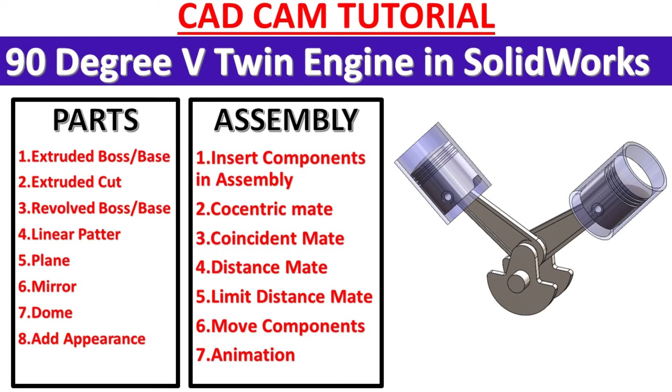Here we will make a 90-degree V-twin engine in SolidWorks, and we will learn part modeling and assembly, and also make animation at the end of the video. I hope you like it.

So let's start to create this simple animation and assembly in SolidWorks. Let's make the first part, the piston of the V-twin 90-degree engine. Zoom in here - all dimensions are in millimeters and the material is steel polish. This is our first part, the piston.

The overall length of this piston is 70 millimeter. Diameter is 70 millimeter. There is one dome shape of 5 millimeter. This is also going to add, but from inside you will see 6 millimeter thick. The inside diameter is 58. If you calculate, the wall thickness is going to be 6 millimeter. So this is what we are going to make.

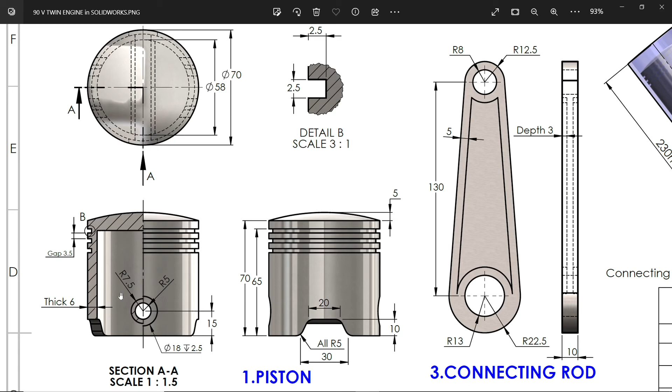You will see 3 piston ring slots. In the detail view, the gap between these two is 3.5, and 2.5 is the actual size, starting from the bottom face at 65 millimeter. Remember these dimensions. Here at another plane, 20, 30, 10 millimeter height. This is also going to be cut through all.

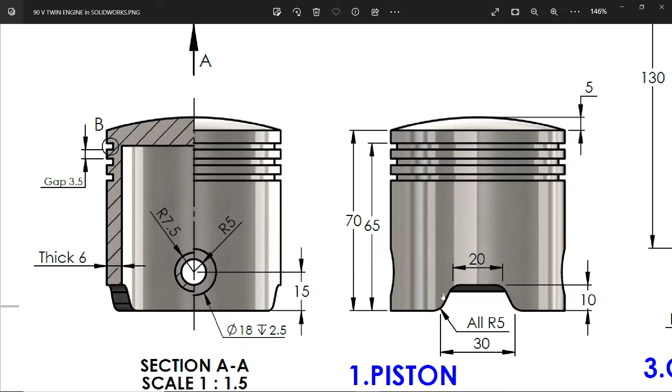First I am going to select the front plane sketch. Now activate the line tool, and I am going to keep this one as a center. Let me select this line as construction, so it makes it easier for drawing.

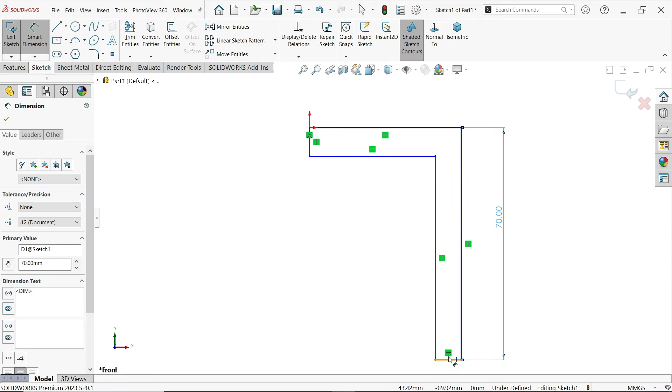Smart dimension, select this one, the length is 70 millimeter. Now select this thickness, let me choose 6 millimeter. Similar here. Now outer to outer distance - if I move my cursor outside it will show you the diameter, 70 millimeter.

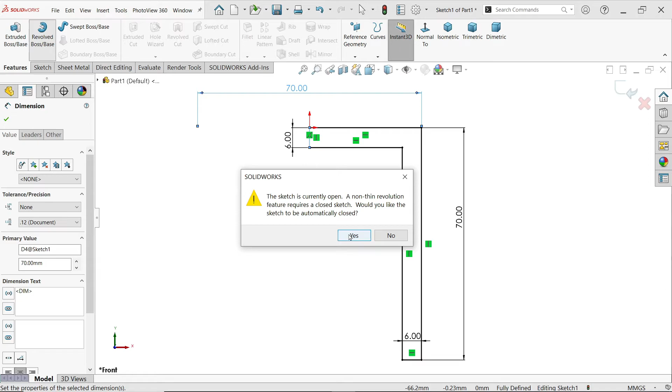Now go to features and activate revolve boss base feature. Due to this construction line, it is asking would you like to close the profile - say yes. The axis of revolution is selected by default by the system. Now keep end condition blind, angle 360, because we want a complete solid body. Say okay. I am going to add appearance from here, metal, steel, and this is going to be chrome.

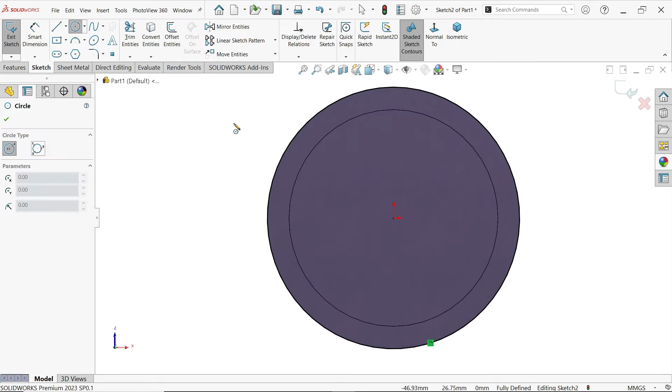Okay, let's add the ring, then we will add the dome shape. For the ring, I am going to select this sketch. Convert entity, so the outer line is converted. Activate circle, draw one circle, press escape to exit. Smart dimension - now the gap between these two is 2.5.

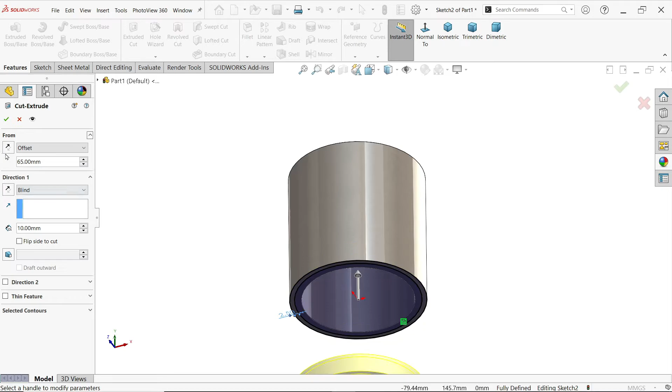Okay, now let's cut. Activate extruded cut. I am going to select offset, and start from 65 millimeter, direction downwards, and depth 2.5.

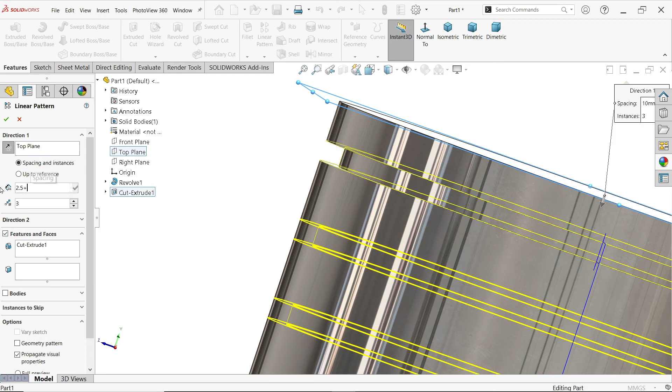Linear pattern - any plane, feature, extruded cut. Actually we need the top plane. This is going upside, change it. Now the gap between these two rings is 3.5, so you have to include 2.5, 3 number of instances, 2.5 plus 3.5, it's going to be 6 millimeter. Say okay, here we go.

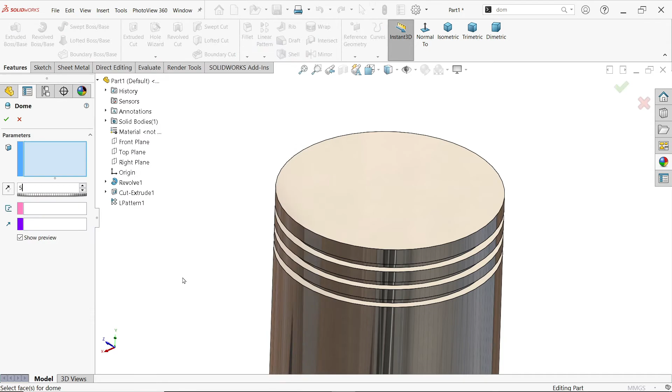Now search the command dome. If you click this eye, it will show you where it's located - automatically it will show you, you'll see this red arrow, dome. Click and activate. Now I am going to make a dome shape of 5, select this face and just tilt - this is how we get a dome shape. For the rest, show preview - if we choose elliptical, it will change the shape, but this is enough for us.

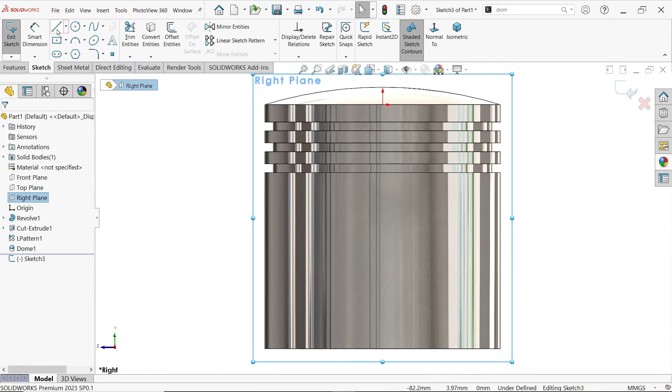Now select the right plane, sketch, activate line tool, connect, press escape to exit. Now let me do some corrections - make it horizontal. Let's do one thing: connect this center point to this center point, make this line vertical. Let's see what else can we do.

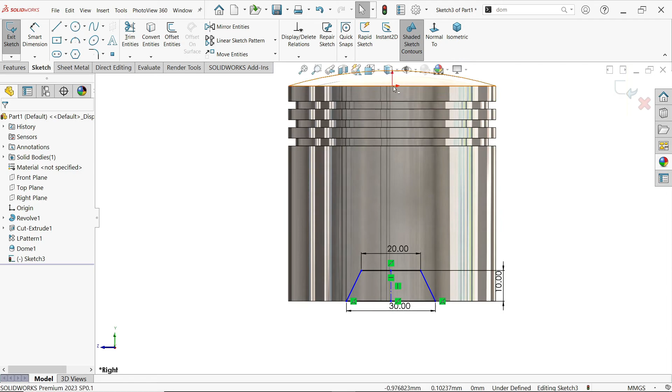30 millimeter, the upper one 20 millimeter, this height 10 millimeter. Now one more dimension we have to fulfill - this center point and this line coincide.

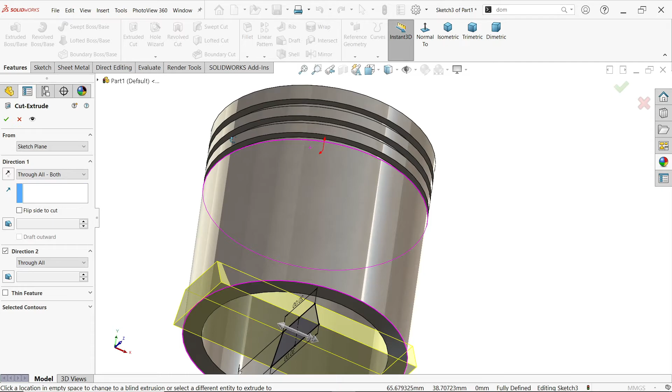Now that's perfect. Go to features and activate the extruded cut feature. This is located at center, so keep end condition through all on both sides, so it's going to cut both sides equally. Say yes - smart.

Activate fillet - first fillet type constant size, fillet parameter symmetric, and here put radius. Now let me select all radius - if I select the first option, connected to start loop, 5. Now see, the system detected all 5s and applied them. Say OK.

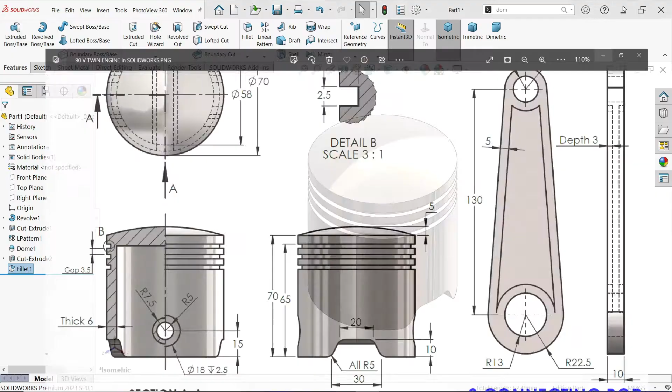Let's see here - there is one hole, 5 radius, then one solid body, 7.5. Then there is an outer cutout, diameter 18, depth 2.5 - remember this one - and height 15 millimeter. This is located opposite of this, meaning the front plane. Front plane sketch, now activate circle.

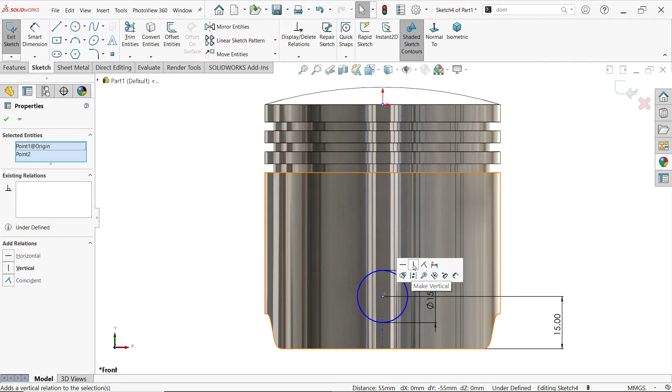Smart dimension, this is going to be diameter, radius 7.5 into 2, it's going to be 15. Distance from bottom is 15. It's still not defined, so press escape key to get out of dimension. Press and hold shift key, select origin point and center point and make relation.

Extrude. Now here select up to surface, select this surface. Go to direction 2, and here also I am going to select up to surface, and this time select this. So it is going to connect inside to inside. Say yes and see, this is created.

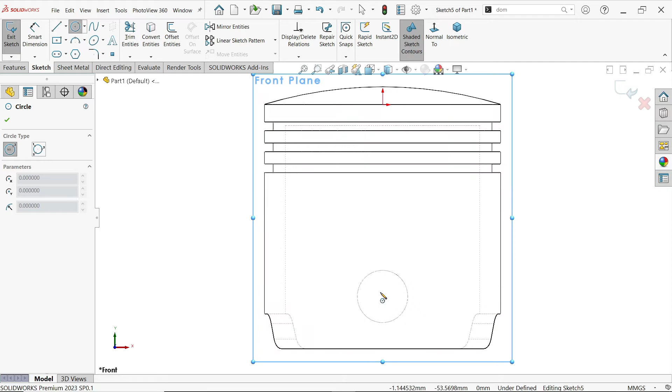Again going to select same front plane, sketch, draw one circle. Now show this one so that we will get center point. Smart dimension. Now this time I am going to activate 18 millimeter.

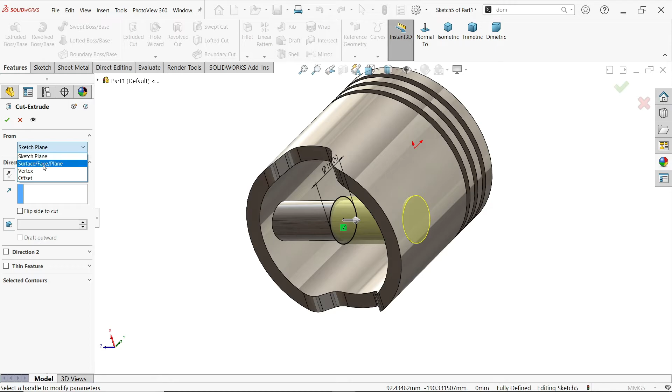Extruded cut. Now this is start condition, we will change to surface. I am going to choose this surface. Keep blind, okay, this is going to start from here. You will see the preview. Just remember this preview, 2.5 millimeter going to cut inside. Look, you will see the preview. Say okay.

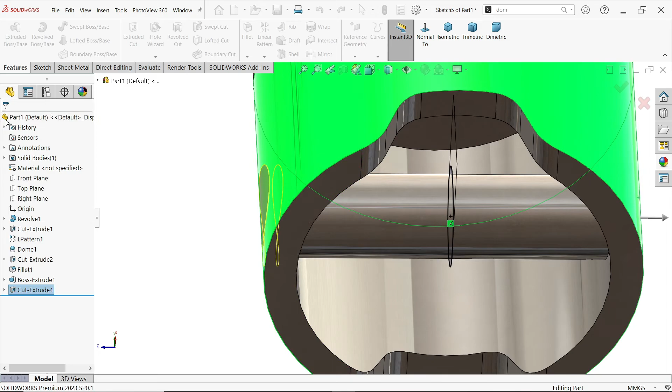Let's mirror this. Plane front, feature to mirror already selected. Partial preview. If you see full preview, it will show you both sides, so partial is enough.

Front plane sketch. Now here we need to make one hole. Select this one. Let's create a smart dimension, and this is going to be 5 into 2, it's 10 millimeter. Now move at center. See, it is fully defined sketch.

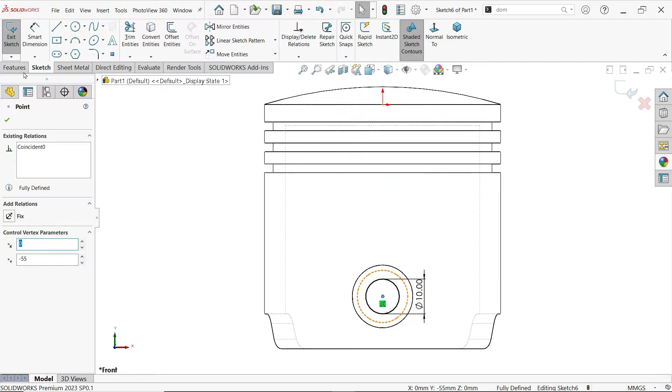Extruded cut, let me change this one. Now here simply choose through all both. See the preview. Say yes. Look.

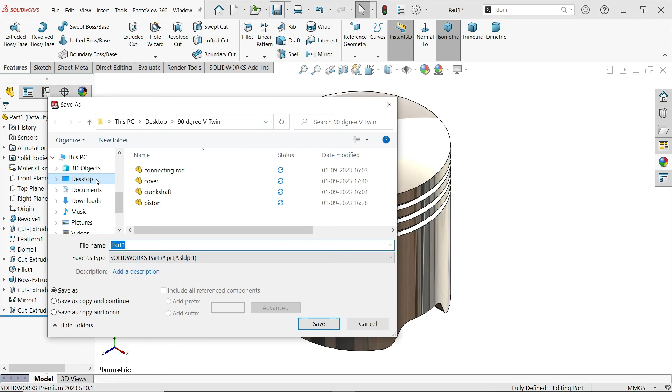Now let's save the first part. Go to desktop, create new folder: 90 degree V twin engine. Now this is part 1, okay, we will change this name later. Let's do a new part. Select new, okay.

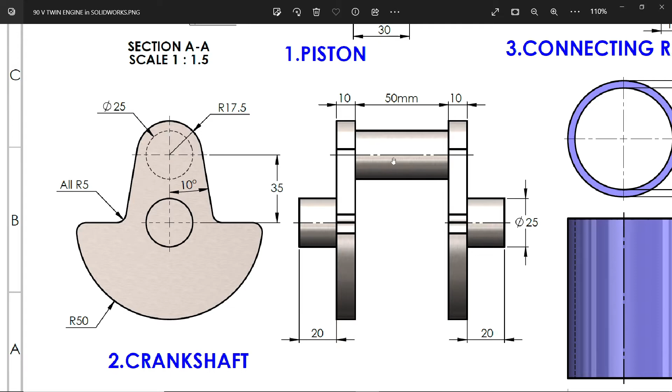Now the next part is connecting rod or crankshaft. First we will make this web. You will see 50, R5, 10 degree corner, 35, and outside radius 17.5. It means 35, thickness 10 millimeter, and there is one circle, this diameter 25 and width 20. So let's make this. Then center there is a rod shaft, 50 millimeter.

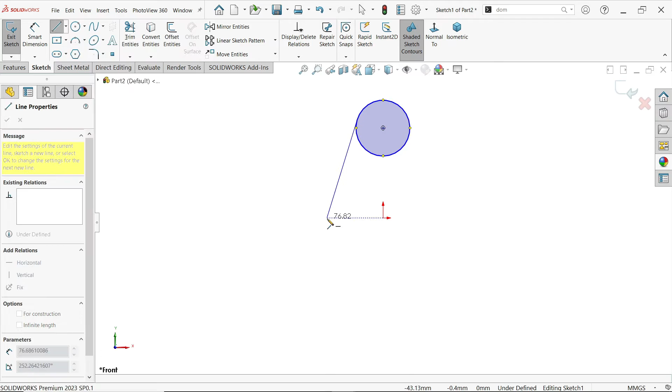Front plane sketch, now I am going to draw. Let's draw one circle. Press escape key to get out. Again activate line tool, draw one tapered line, something like this. Go back to the point and see the line is converted into arc.

Move cursor and you will see tangent point. At that point, press left mouse and click. Press escape key to out. Now first important thing, select the center of this, hold shift key, select this, concentric. This is going to be good. Select this point, hold shift key and origin point, make vertical. This is also important. Now select these two, equal.

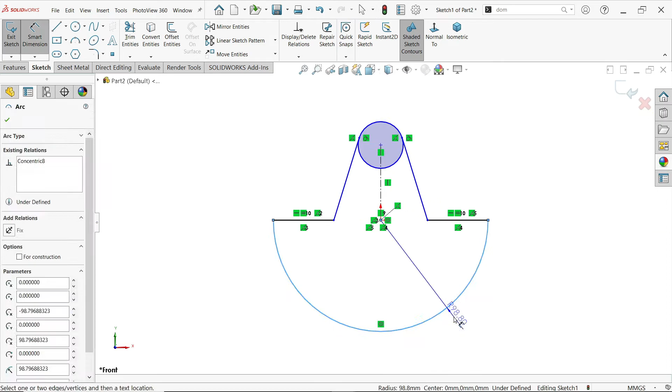Okay, let me draw one circle. Smart dimension. This radius is going to be 50 millimeter. This diameter 35 millimeter. Center distance 30 millimeter. Now angle 10 degree. Now look, this is fully defined sketch.

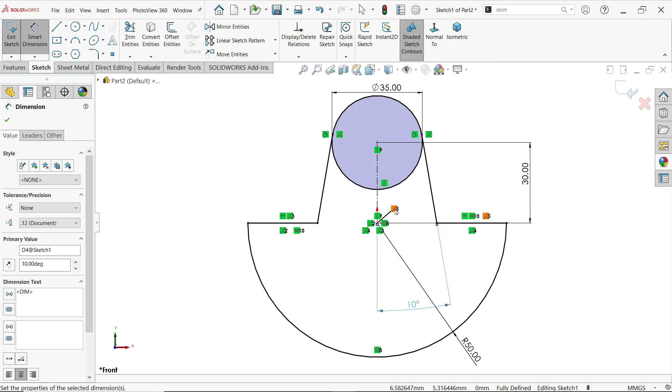Press trim entity, power trim, and just trim this. Okay, now we have one closed profile. Simply activate extruded boss base feature. Here choose blind, start condition keep same, blind 10 millimeter. It is moving in one direction, let me push to the other.

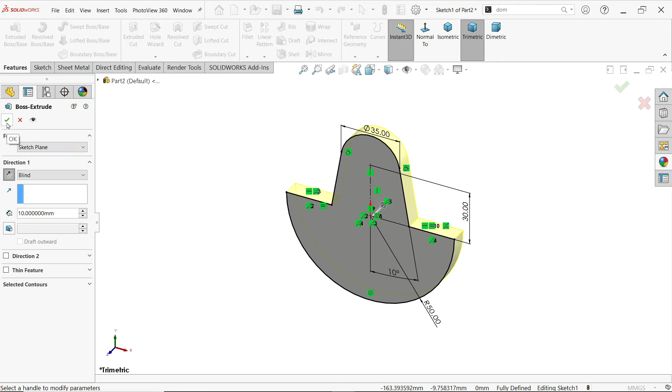I am going to activate fillet, constant type fillet, radius going to be 5, symmetric, and let me choose. Select this portion and you will see this option. Select this one and it will select all corners. Say okay. Look, select this face, sketch.

Activate circle and place at this origin point. Draw one circle. Press escape key to out and activate smart dimension, and this is going to be 25 millimeter. Extrude, and how long is this going to be extruded? Keep end condition blind, and the depth of this 20 millimeter.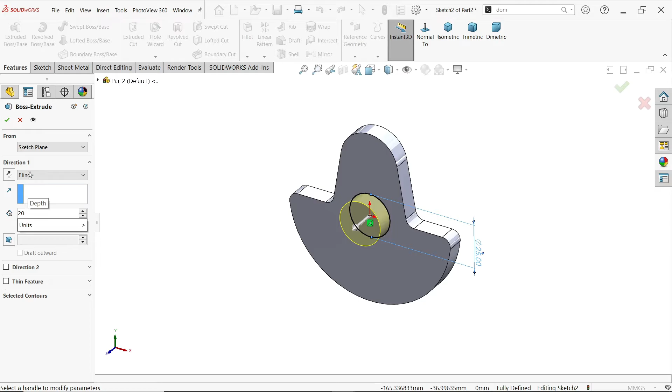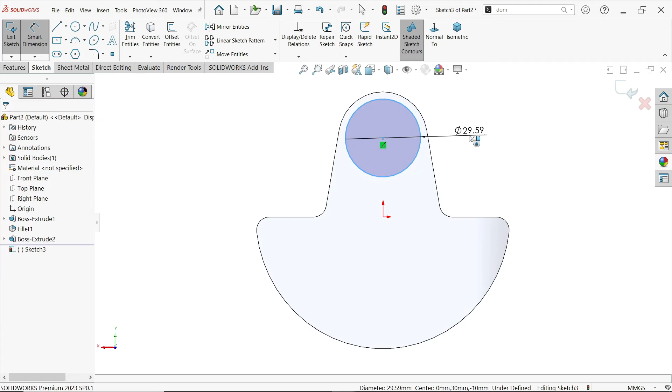Okay, similarly select this face, sketch, activate circle, keep cursor over edge and you will find the center point of this. Draw one circle. Press escape key to out. Now make this dimension 30 millimeter. No, not 30, it's 25.

Go to feature and extrude. And this length of shaft is 50 millimeters, so keep end condition blind and 50 millimeter is the length.

Okay, now I want to mirror these two things, so first we have to create a plane. Activate plane, select this face and you will see a mid plane. We selected two faces and we will get this mid plane. Say yes. Go to mirror.

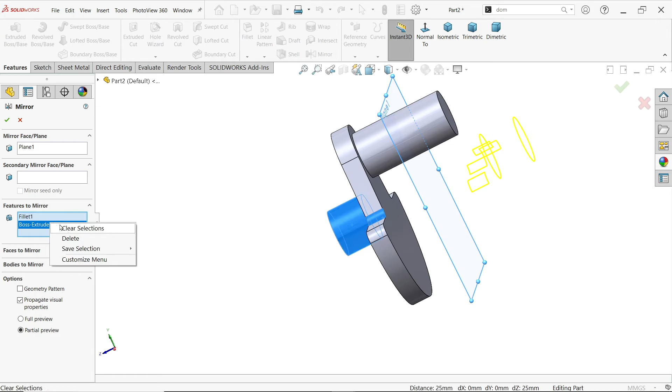Now plane is already selected. Go to feature, select 1 and 2. Clear 1, 2. Full preview, even though from here you can select, and here add fillet.

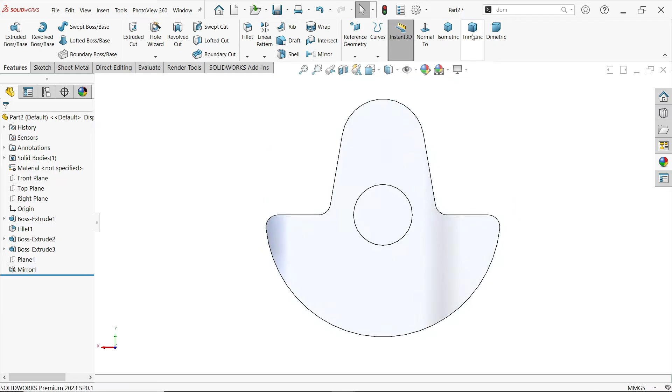Okay, now look, click hide. Now this time brush steel. Let me save this, this is going to be part 2.

Crankshaft. Save. Even though, let's go to options, document properties, image quality, keep image quality higher so that you will get a sharp edge.

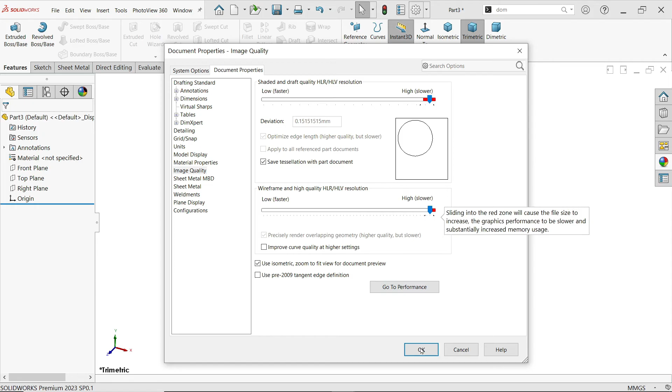Let's make a new part. Plain white. I am going to do all the necessary things like document properties, image quality, keep higher. Now here the third thing is connecting rod.

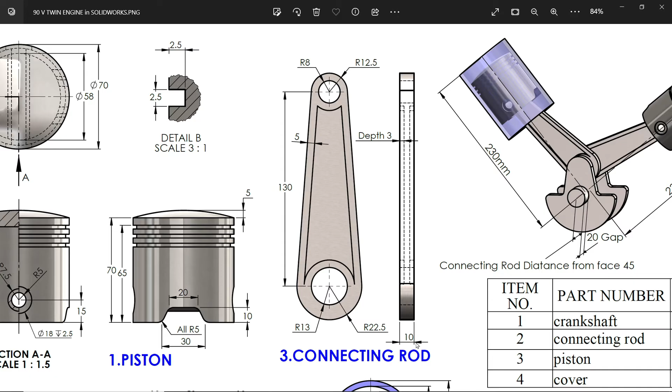130 length, you will see outer radius 22.5, 13 millimeter inside one. R8, 12.5 means outer one 25 diameter. Then there is a depth cutout 5 millimeter, depth 3 millimeter both sides. So remember this, and thickness of this 10 millimeter.

Let's say front plane sketch, activate circle. Now let me draw here 2 circles. Similarly at opposite upper side draw 2 more circles. Now let's do one thing.

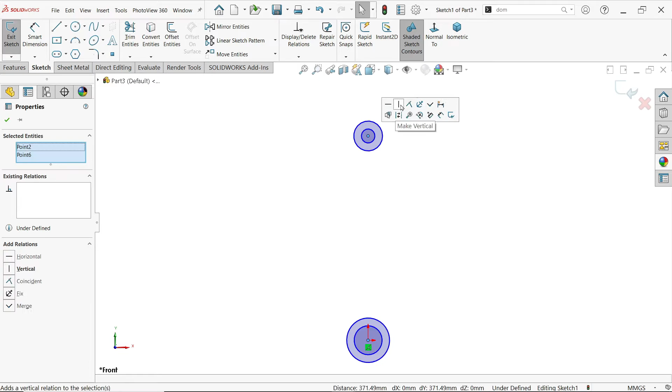Hold shift key, press and hold shift key, select both the center points vertical. Activate line tool, just click somewhere on the line and press at the place where you will get tangent point. Press left mouse and press escape key.

Again press L key in your keyboard and activate line feature or line tool. You start from this time here, come to this. Okay, here. Okay, let's start.

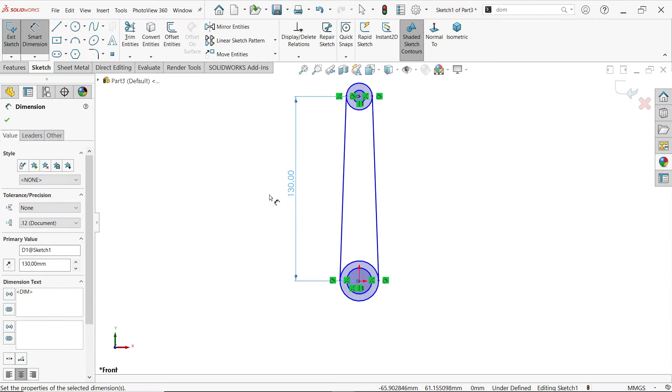130. Now let's do the bottom one first. 22.5 into 2, 45.

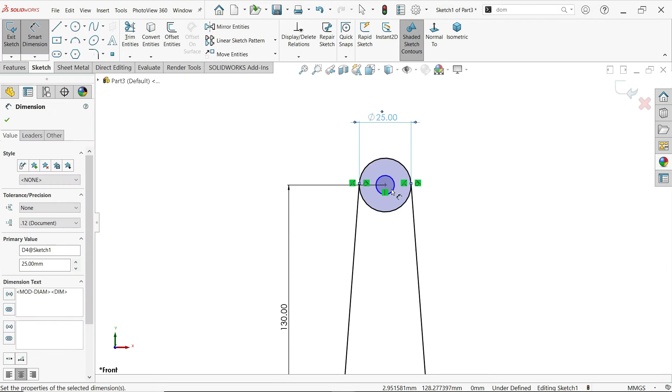Similarly, the inside radius 13 into 2. Okay. 12.5 into 2. R8 into 2.

Now see, this is going to be a fully defined sketch. Now activate extruded boss base feature. Here we have too many closed profiles, so you have to select all the profiles. Start condition same, blind, end condition blind 10.

Now here in selected contour you have to choose all the 1, 2, 3. End condition keep mid plane, so it's easy during assembly. Okay.

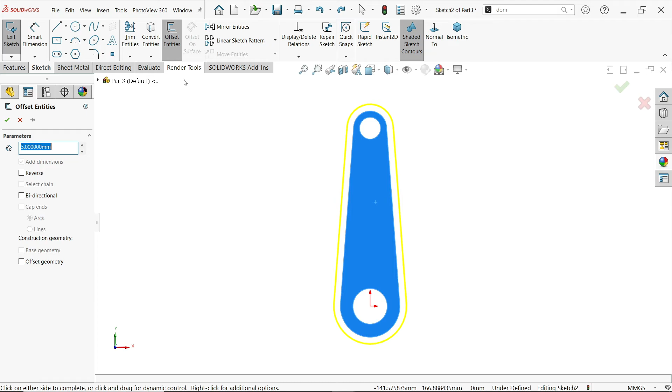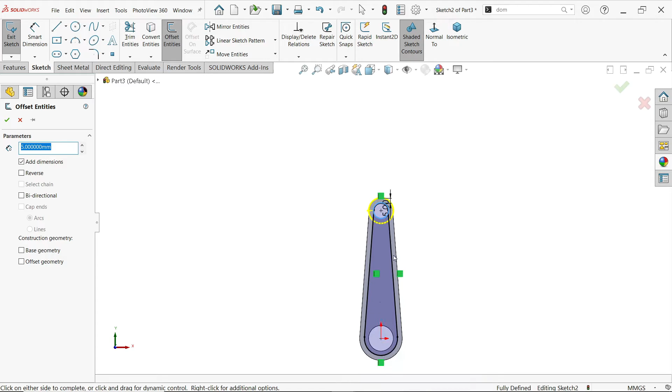Select this face, sketch. Now activate offset, reverse. Keep 5 millimeter. Okay, let's keep as it is. Again choose offset, 5 millimeter, one side. Okay.

Entities. Now activate trim entities, power trim, just press and hold the left mouse and drag which line you want to trim. That's it.

Activate extruded cut feature and depth is 3 millimeter. Here keep end condition blind and put the dimension 3 millimeter. It's going towards perfect inside.

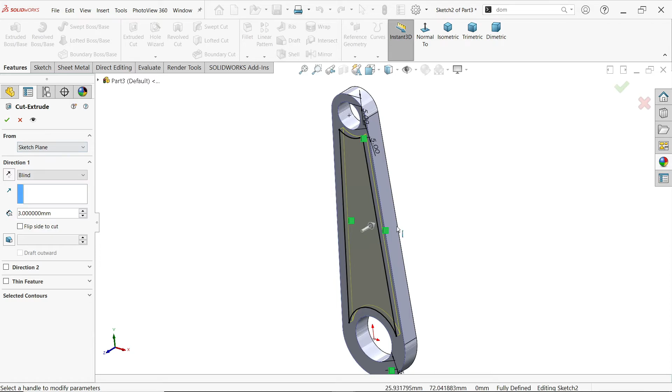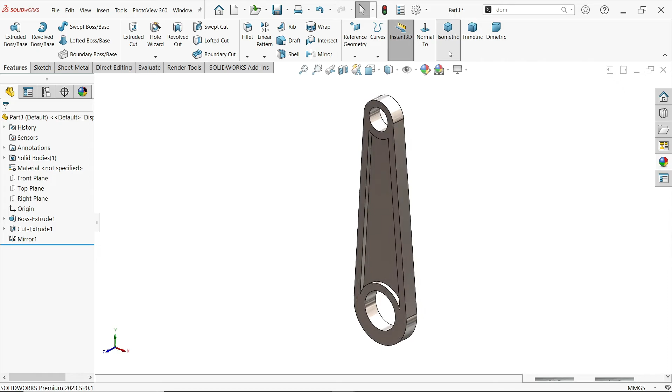Now front plane, mirror entities, mirror feature, feature to mirror. Here you have to select extruded cut. You will see the preview. Okay, now look both sides. Select the body, appearance same. This is part number 3, connecting rod.

Let's make a new part, the last part, it is a kind of cover. This is going to be used as a block engine cover, 70-80 the diameter, 110 length.

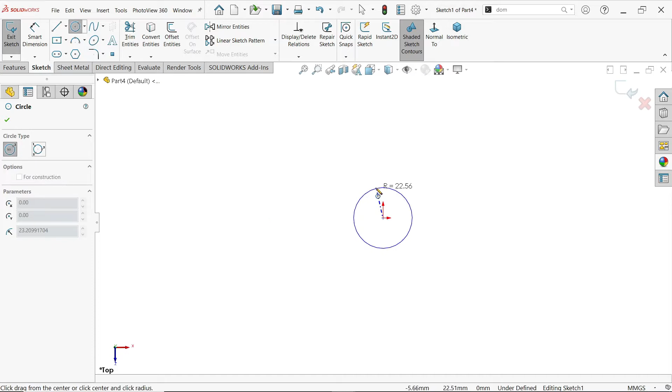Top sketch, now activate circle and draw 2 circles from origin. Press left mouse on origin point and drag your mouse and see. Similarly do twice, press escape key to exit. Activate the smart dimension, 80 millimeter, and the last inner one 70 millimeter. This is the piston diameter.

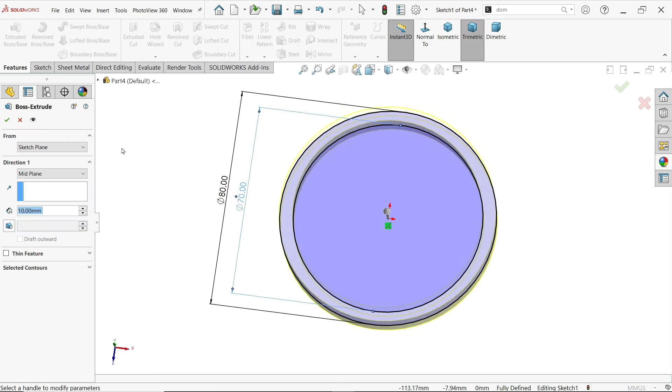Activate extruded boss base feature, and here I am going to select mid plane. Now length, total length 110 millimeter. Say OK.

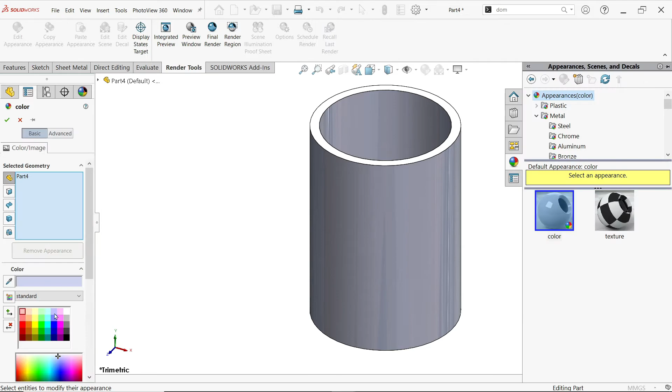Now let's apply some color to this. Okay, save. Part number 4, cover.

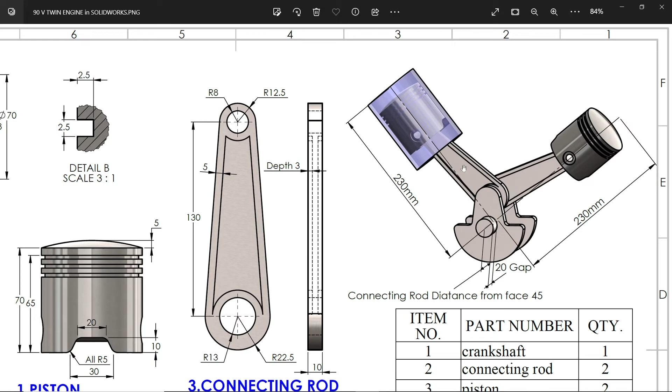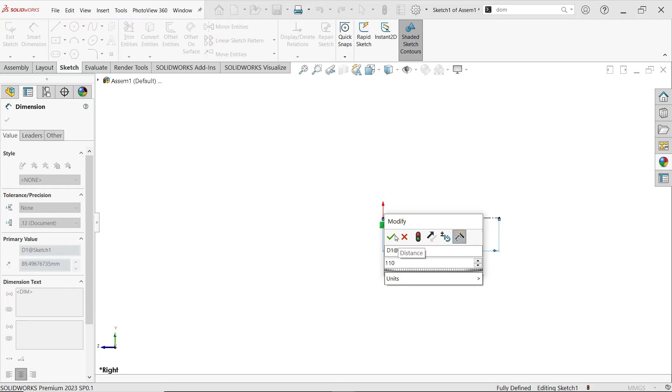So I'm going to choose right plane, sketch, draw one center line. Now this is the overall length. How much this length? This is going to be connecting shaft length 50, 10, 10, 70, 70 plus 20, it's 110 millimeter. Now exit. Now let's create one plane.

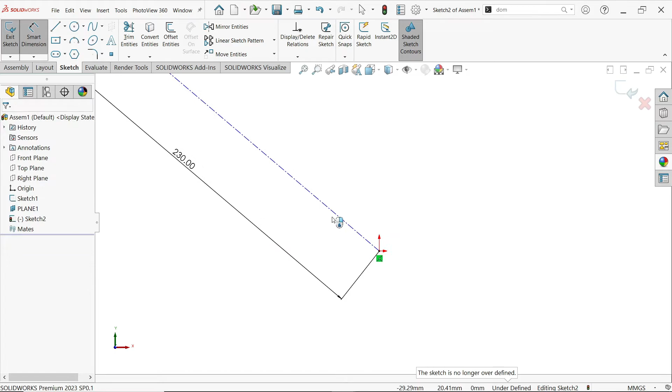Front, see, 45 millimeter first plane. Reverse. Okay. Now select the plane, sketch, activate center line, smart dimension, length 230 millimeter. Okay, again select the length and select the point, and cancel. Select this origin point and you will see this triad, so select this one, and 90 degree is V twin engine, so 90 divided by 2 is 45 degree.

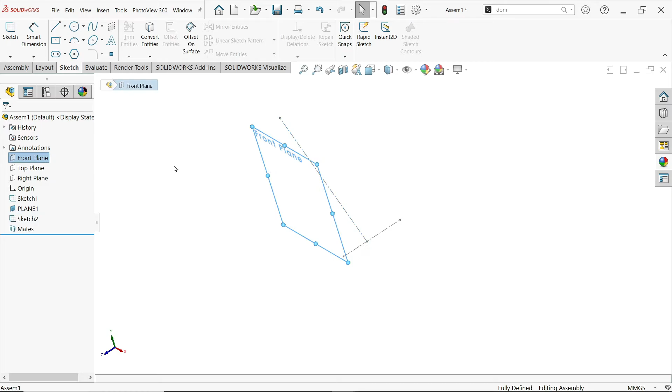Exit. Similarly again I am going to select which plane for this, front plane. Now 20 millimeter is the gap, so select this plane 1, reference geometry, again choose plane. Now gap between these 2 planes 20 millimeter. Flip side. Okay.

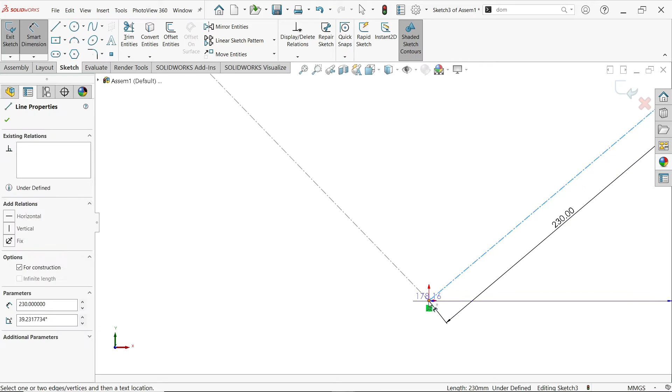Select plane 2, sketch, again activate and draw one something like this. Length 230 millimeter. Now this time angle going to be 90 degrees, so 45. Select this point, select this one, select this triad, 45. Exit. Now just check 3D view. Oh, look. Now let's browse our part.

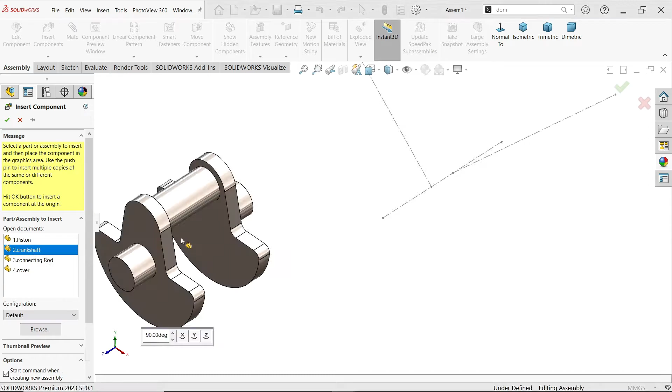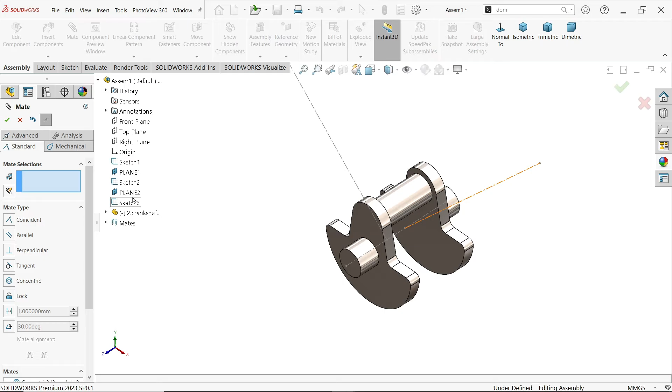Now first we will settle down crankshaft. Okay. Right click and make float. Now this is floating. Mate. Select this circular and this one. And make sure selected concentric. Okay. Now here one more important relation we have to select. Select this face. And this is located at front plane. Look. Okay. Cancel. Now let's see. This is rotating along with this. This is what we like to keep.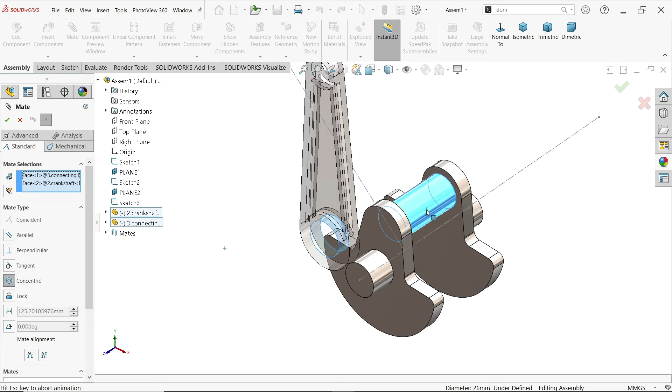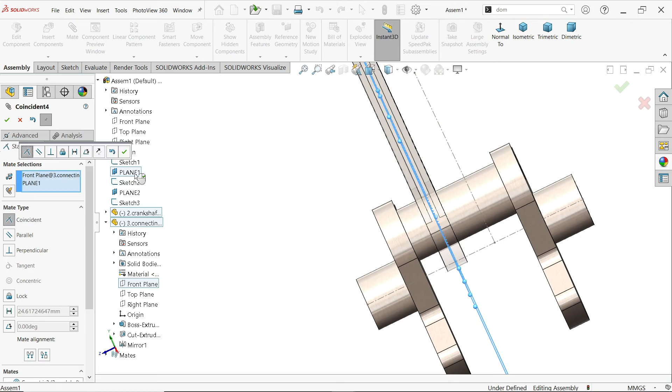Now insert component. This time bring connecting rod. Activate mate tool. Select this one and this one. Keep relation concentric. Okay. Just move from here. Now we have to make distance. This distance 20 millimeter. If you calculate this from drawing, 45 from one end, so we have to make one important relation. Front plane of this connecting rod, and let's check. We already created plane 1. Select plane 1. See, this is going to mate at plane 1. Okay. Cancel.

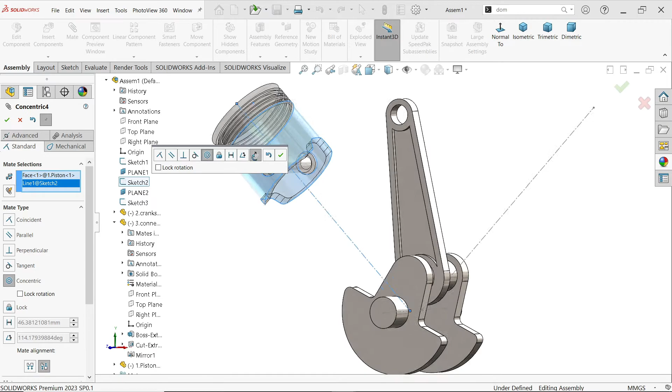Now bring again piston. Just rotate component. Okay. Now select this one, mate. Now select this line. Not coincident. Just check what it should be, concentric, because this is going to move along with this. Okay. Now select this one, rod inside, and this concentric relation. Okay. Now I am going to check isometric view. Okay, this is going to be seen.

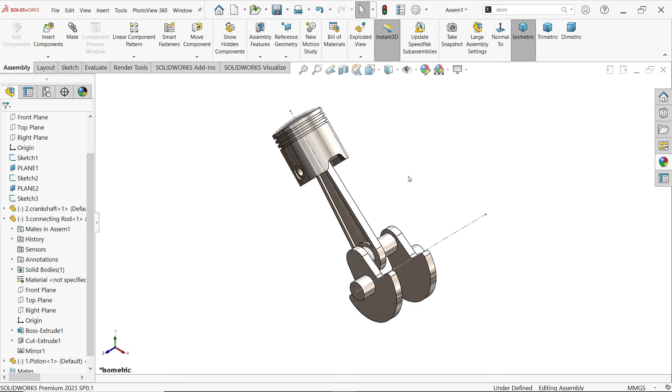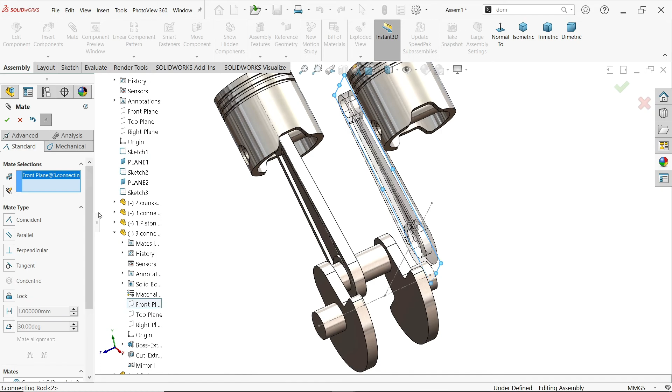Now press and hold Control key, select the part and drag and make copy. Again press and hold, click the part, drag and copy. Okay, let's create one by one all the relations. Activate mate. This rod, shaft and the concentric relation. Now again we have to select connecting rod front plane. That's it. And here we created plane 2. So select plane 2. Okay. Now this is perfectly aligned.

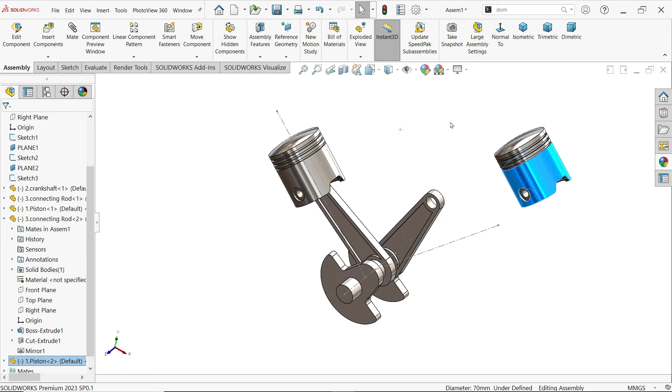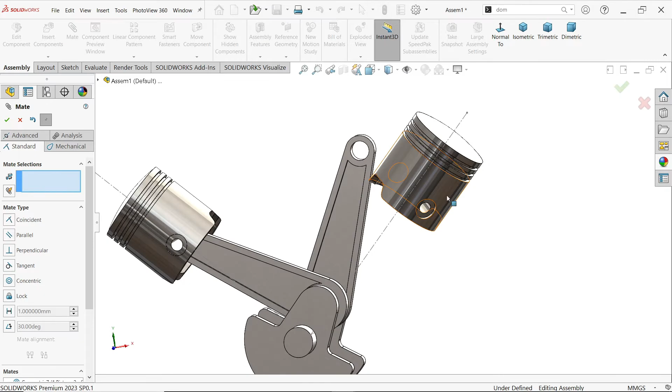Now let's align first. This is important, otherwise your geometry will be in mess. Okay. Mate. I am going to select this surface and this one. And here again make concentric relation. This is important relation. Okay. Now rotate. Select this rod and this piston. Make relation concentric. Okay. Finish. Isometric. Look. This is how we created.

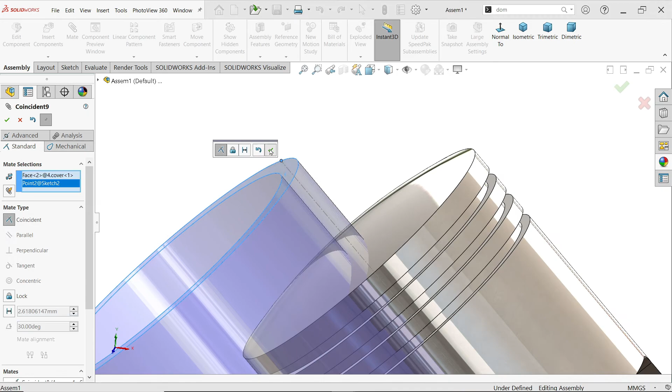Okay, let's bring the last part. Cover. Okay. Mate. Select this outer face and this circle, concentric, and one more relation. Select this face and this face coincident, but this is not concentric. This relation, choose concentric. Okay, fine.

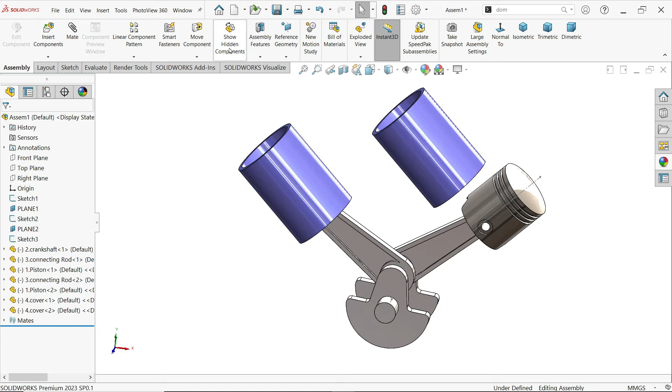Again press and hold Control key, copy. I am going to first rotate component. Okay, mate. Select this one and this construction line, concentric relation. Okay, again select the face, outer face of this and end point of this, concentric relation. Fine. Click change transparency, click change transparency.

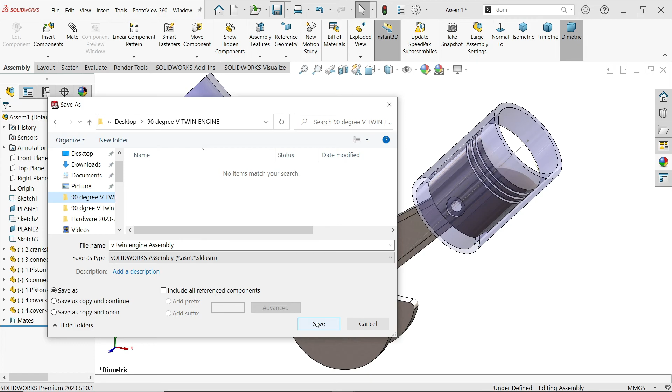Now first save this one, save all. Assembly, V twin engine assembly. Note this location is different, 90 degree. This is going to be our location. Now right click, go to toolbar and activate Motion Manager. Now go to motion study. Here keep animation and drag this one 8 seconds. Frame I am going to keep 60 so that we will get smooth.

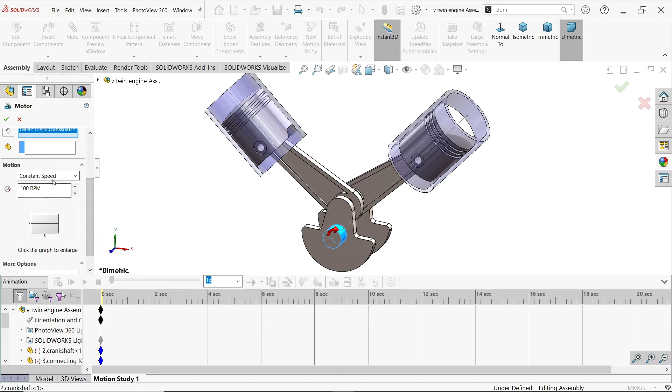Now here activate motor. Select this one. We will keep 100 constant speed. First you have to choose rotary motor because this is going to rotate, not actuator. Face we already selected here. Constant speed 100 RPM. Say OK. Okay, this is going to drag up to 8. Now first calculate. Done. Now play from start. Now look.

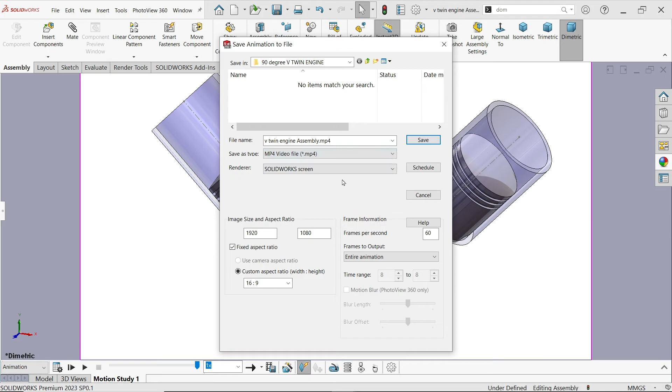If you want to save this animation, save animation. Now here let's keep the ratio as it is, even though you can change. Okay, this is going to cover 16:9 ratio, frames per second 60. You just give the name, file type MP4, save. Now it is asking you, would you like to calculate? So this is going to calculate from start, and once the calculation finishes, it will save in your destination.